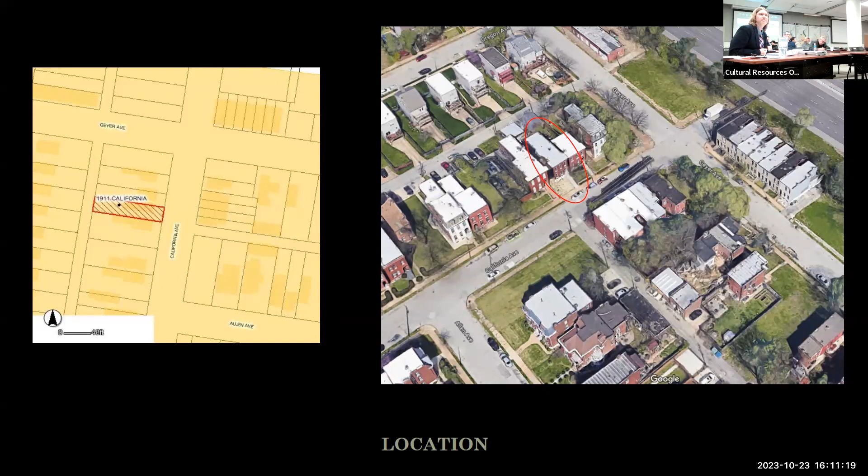Here's some context: across the street, an empty lot. To the south of the property, there are several existing historic poured concrete retaining walls. Looking north, to the north on the west side, next to the applicant's house, there are a few modern retaining walls that did not get permits. Not sure when they were installed, but they were unpermitted from us as well, though older, so they were grandfathered in.

Up top is a copy of the applicant's planting plan, which you've also received a copy of. Down below is a detail of what's constructed - it's a red Versalock wall.

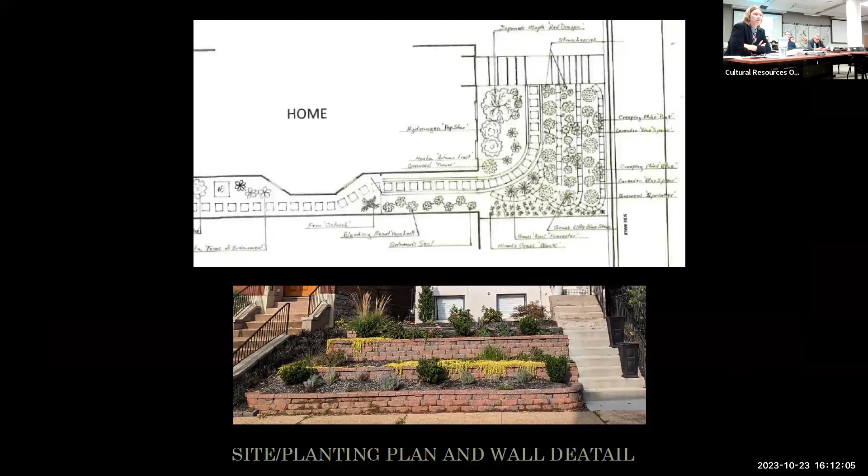Essentially, what the ordinance says is you can't install retaining walls on an unaltered slope. And if you were to, it's required to be based on a historic example, meaning a natural stone wall of some sort - base it on a historic wall and replicate that. So you can't do an artificial wall like she's done with the stone or artificial concrete, and obviously the design itself, this 3-tiered wall system, is not based on a model example. So we cannot recommend approval for this.

We have a letter from Fox Park. They also support staff's denial of the project, so we recommend that the board uphold the denial. Any questions, commissioners?

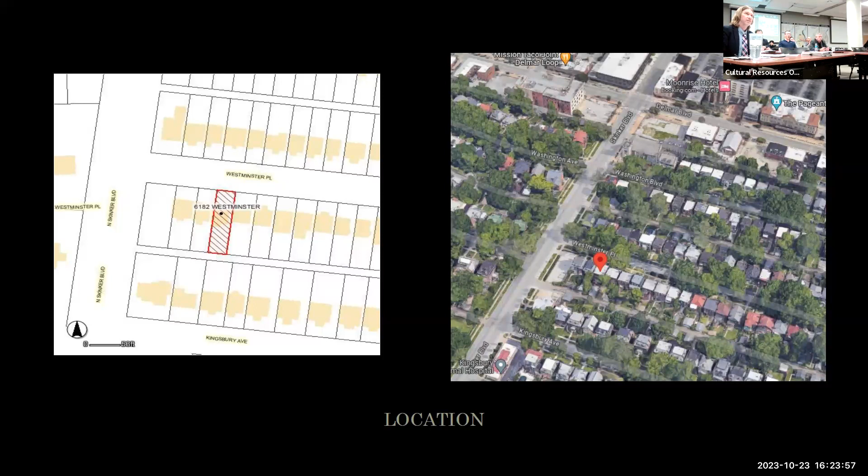Next, just a quick location. We're just to the east of Skinker. It's on the south side of the street, a very obviously intact row of houses on Westminster. There's some street level context. Obviously it's a mix of mostly frame porches. There are some masonry porches mixed in, but it's a pretty intact lot. This is looking towards Skinker. Okay, this is the current condition.

Some quick background. Back in July, the area building inspector stopped the installation of metal handrails on this porch. That work would require a permit from our office, but also a building permit because it's a handrail on a porch. We got hold of the owner, and they've applied for a permit. I spoke with the contractor. They'd already made the metal handrails, but they removed them and put back the current wood handrails. So what you see right now is the current condition.

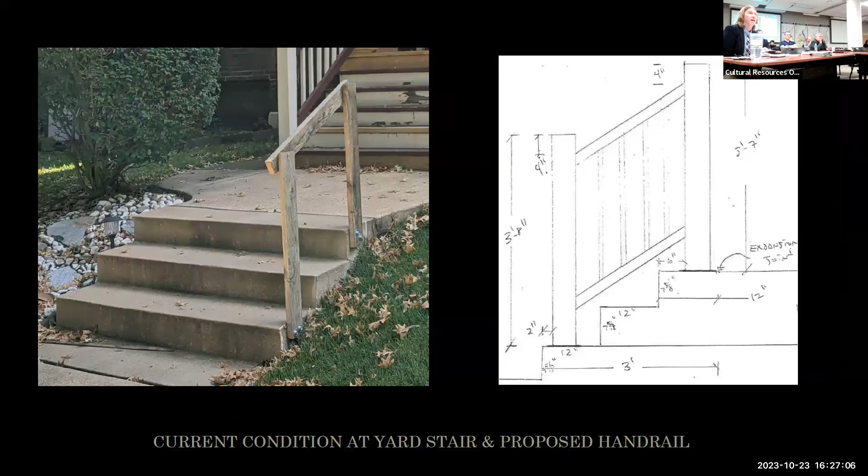So what the code says in Skinker DeBaliviere is you can't mix materials. If you have a wood porch, it needs to be a wood handrail system. So the proposal to do a metal handrail system is not compliant with the code. That's pretty much what this boils down to. The design is modern and doesn't really meet the standards in the code, so we can't approve it at this level.

You have a letter from the alderperson who's in support of it. I have talked to the neighborhood, and they are also in support. We have a letter showing they are in support of the project as well. But staff recommends that the board uphold denial, as the proposal does not meet the standards. Any questions for me?

What is the Skinker DeBaliviere Historic District Review Committee's reason for supporting this? They felt that the owner had already made a monetary investment in the project. They thought it's unfortunate, but they're using it as a learning opportunity, as discussed with the chair of that committee.

So just to clarify, did they try to tackle this without a permit? Yeah, it started without a permit. I talked to Mr. Gately, I believe he might be here as well. He's not a local contractor in the city, so he was unaware of needing a permit for the work. He claims ignorance. I understand that happens sometimes, but he did start without a permit.

Commissioner Richardson: So you said the existing handrail or railings are also not compliant? Well, they're not original. Had they been proposed today, we probably couldn't have approved them either because of the design.

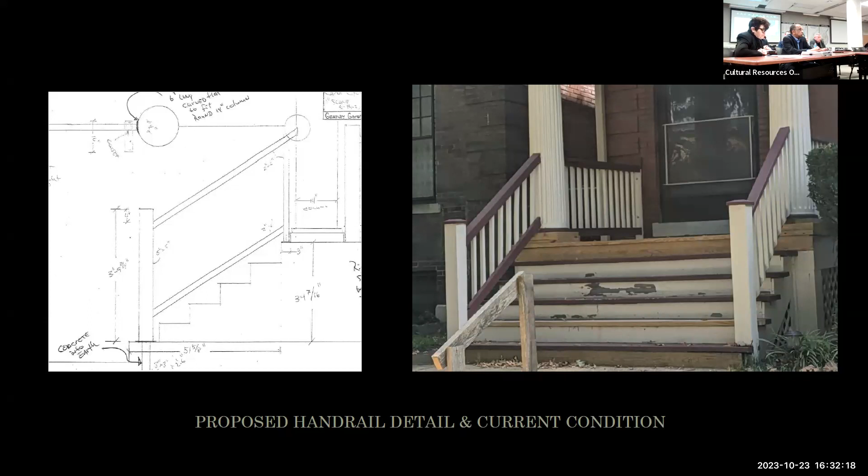Thank you. Kenneth and I are both senior citizens. We may not look it, but he's 77, I'm 75. We're aging in place, on a fixed income, trying to maintain the integrity of our home. We're looking for something more durable, sustainable, low maintenance over time, as well as cost efficient. We want to continue to increase the property value of our home, as well as make something aesthetically attractive.

That was the reason why we wanted to go to metal as opposed to wood, because it would be more sustainable for us as far as maintenance. There are some metal railings on our block as we drove over, and they're senior citizens. We thought maybe we need to look at another way as we continue to age in place and be more cost efficient, as well as maintain the integrity of our home.

So we're asking for your support. We went to Skinker DeBaliviere and they have supported us, and we've gone to our elected officials and talked to our neighbors around us, and we seem to have the support. So we're asking for your support for us.

If you have any questions as far as the size and all of that, I don't necessarily have those answers, but I'm sure you can get them from either Steve or myself if we need. Mr. Lloyd, do you have anything to add? I think she's covered it all.

Thank you. Commissioners present, questions? Virtual commissioners, questions? I've got one. So where are we in the process with City Hall and permit review of this? Have they passed for safety? They would be code compliant with the building code, yes.

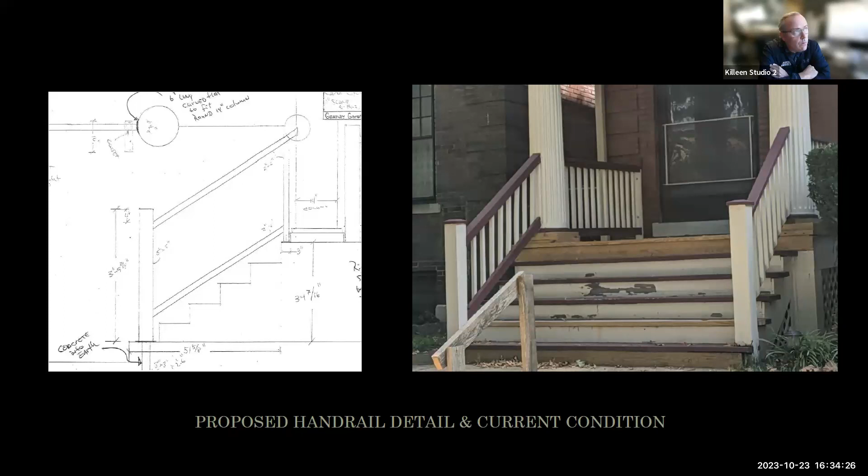Are you referring to the one in the terrace, Mike? Well, you showed two pictures. One was the flat one up on the landing, and then the rails going down. So the one on the left there. So the step railing and the railing on the porch are compliant. Again, I don't believe you need a building permit for the ones in the terrace. Okay, got it. Thank you.

Further questions from virtual commissioners? Can I ask, the existing railings that are there that you're going to replace, did you put those in? Yes, we had those put in. How long ago did you do that? About 20 years ago.

And how much did you get a price to see how much it would cost to replicate what you have versus doing the metal? Was there a price difference, or did you get a quote for replacing exactly what you have? We did not get a price quote for wood railings because we were looking at something that was going to be more durable over a period of time as we continue to age. We did not price wood railings. We were looking for something that would take us through the duration of living in that home.

Got it, thank you. And is it not true that if they had tried to replace what was there previously, and if they had happened to apply for a permit, we would not have been able to approve it? That is correct. As is, we've not been able to approve that design specifically, but we would work with them to modify it a little bit.

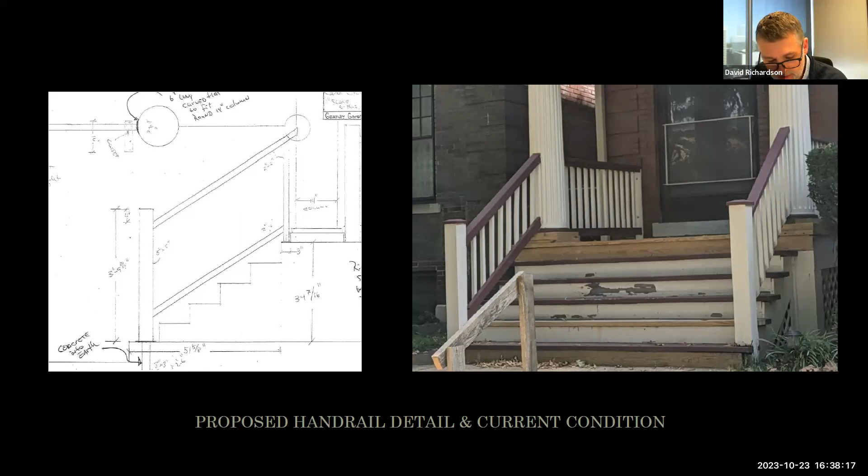Commissioners, we have a motion before us. It is to overturn the director's denial. Commissioner Allen, yes. Commissioner Hammaker, yes. Commissioner Colleen, yes. Alderman Ryan, yes. Commissioner Richardson, yes. Commissioner Robinson, yes. Chair abstains on this vote. There are six yeses, one abstention. The appeal is upheld.

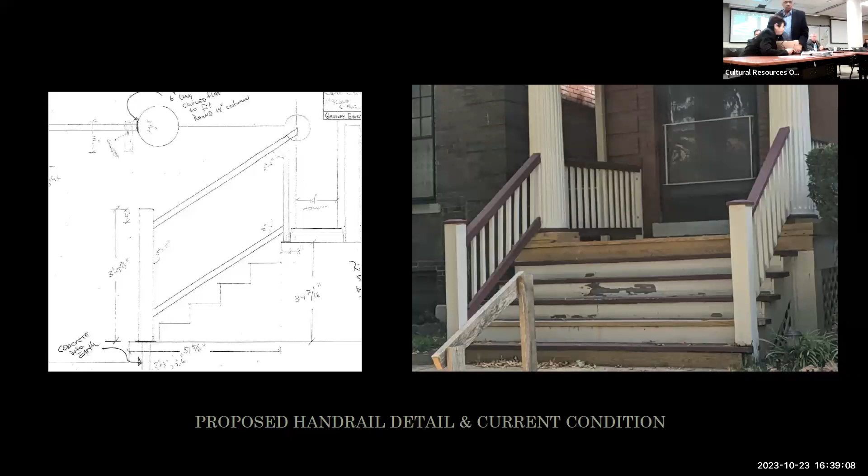Calling agenda item D. Do you want to take a break? I'm fine, but if anyone else needs a break, that's okay. Okay, here we go. I'm sweating, apologize everyone. It's hot as a lizard. We could take our jackets off. We could not.

Agenda item D. Good evening, board members and members of the public. My name is Meg Lousteau with the Cultural Resources Office, and I swear to tell the truth. I'd like to enter into the record Ordinance 64689 as amended by 64925, Preservation Review District Ordinances 64832 and 66609, the agenda, the PowerPoint, and my presentation. This is an appeal of a denial to demolish the building at 1308 North 7th Street. It is in the National Register District, the Sligo Iron Store Company Buildings National Register District, and therefore covered by the Preservation Review District standards. So we have jurisdiction as well as you.

The building is a high merit structure per the definition in Ordinance 64689, and represents a major component of the Sligo complex and the industrial history of St. Louis. According to the assessor's office, the current owner acquired the building in 2012. The owner now wishes to demolish. There have been no permits applied for or issued since the purchase date, and there are no plans for construction on the site, which would remain vacant. We denied the demolition application as the building was determined to be high merit, in sound condition, and the proposed subsequent development would be a vacant lot. The owner has appealed, and we are now here.

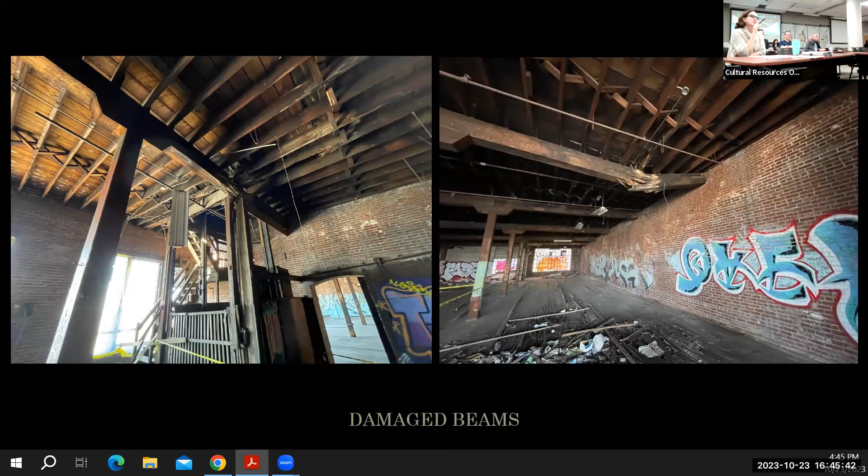And then, as I mentioned, there is an area of localized roof damage. This is a shot from the 5th floor looking towards the northeast corner of the building. You can see the area here on the left, and then there's a closer up version here on the right.

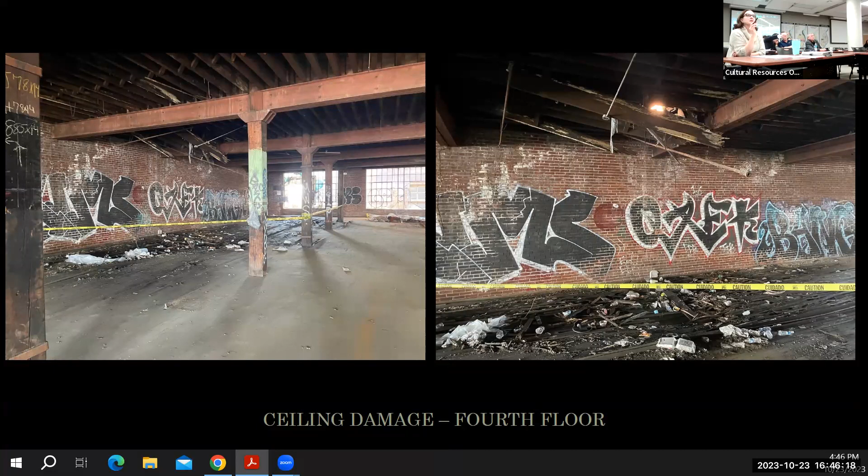That is the 4th floor. So that roof damage has damaged the 5th floor and also the ceiling of the 4th floor. In that spot, you can see both of these shots reflect that localized area. And then this is the rest of the 4th floor.

Okay, so in conclusion, we made these preliminary findings. 1308 North 7th is a high merit building within the Sligo Iron Store Company Buildings National Register District, so that means it's considered under the Preservation Review District Ordinance. It is sound under the definition in Ordinance 64689. The building is located 3 blocks from the America's Center Convention Complex, and there is potential for its reuse. There is no proposed subsequent construction; the result of the demolition would be a vacant lot. So we ask that you uphold the denial of the demolition.

And would you remind me, what is the definition of sound under the ordinance? That staff believes that the walls are capable of holding their loads for 6 months or more. So just to clarify, is it not the visible portions of the exterior walls and roofs appear capable of carrying their loads for 6 months or more? Thank you, board member. Yes, that is a more complete definition. Cool. And so what you just testified to with that full definition, you believe it's a sound structure? Yes, and Mr. Kapolis, the building inspector, will speak to agree with that and maybe offer a little more technical expertise.

With respect to reuse potential, as director of the Cultural Resource Office, have you witnessed similar buildings adaptively reused? Dozens in my career in New Orleans and a few here. Warehouses are usually very adaptable because they have a lot of open space, with more reuse options than you'd find in more constricted buildings.

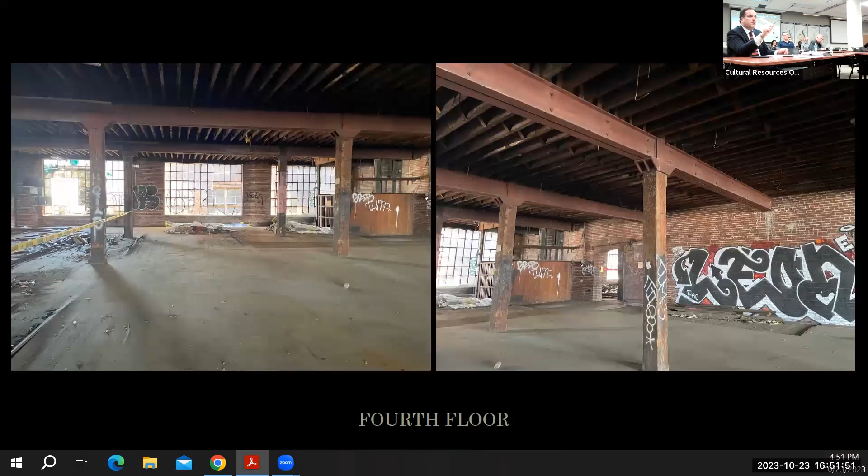The property adjacent to this building—if you go back to the photographs entered by Ms. Lousteau, go back one more, please, keep going, I'm sorry, I think there's a couple more before that—a little bit more to show the picture right there.

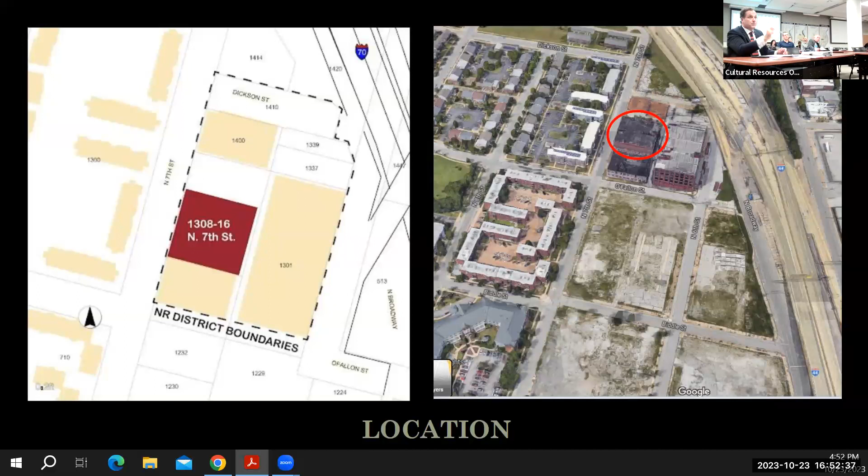If you'll go forward, I'll show you some of the structural damage—go back one, one more—you'll see there what remains of the building that burnt. That building used to come all the way out to the street; it was a 2-story warehouse, now completely gone, with just some steel structure and a portion of an exterior wall separated by less than 4 inches from the exterior wall of the building in question. We'll go forward, please—a bit more—right there, stop.

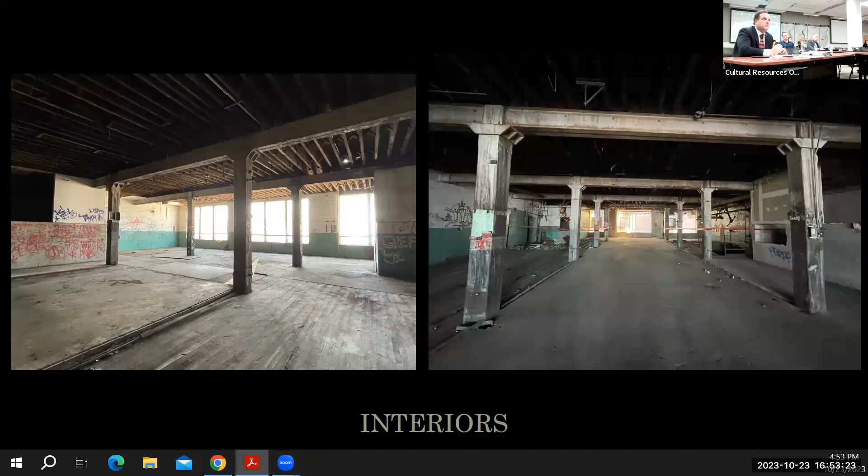One more on the inside. The picture on your left, the column that is halfway back on the left-hand side - do you see the red tape? That opening, the column immediately adjacent to it - if you could zoom in, the engineers will testify that the bottom portion of that column, from the tape on down, is completely deteriorated. It is offering no support at all to the member it's on, and each floor stacks on top of that column. If you'll go forward, you'll see some deflection.

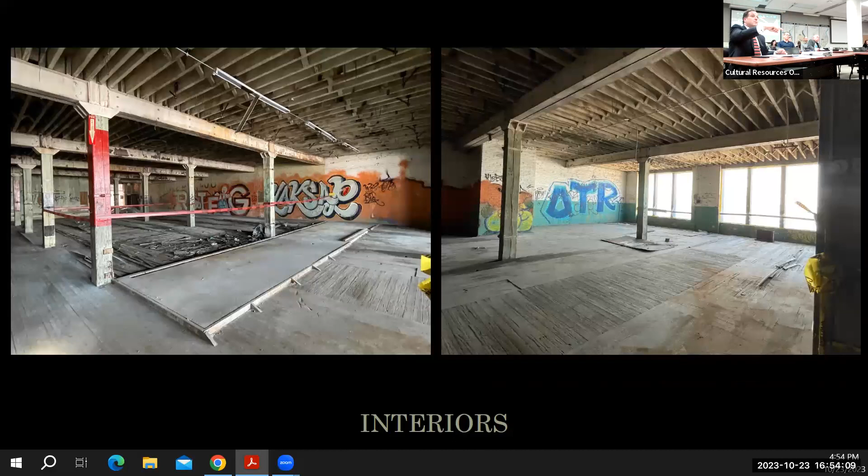One more. I think it's the next one. And that's on the other side. There's another one that shows it. Go a little further.

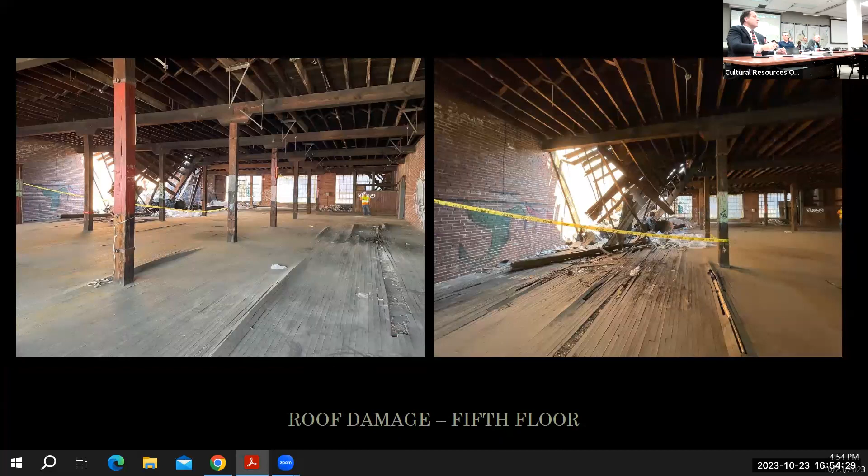That column, okay, this right here shows the collapsed roof. On masonry brick walls that are unreinforced, the roof provides the lateral support for the exterior walls. With the roof being seriously compromised, like it is in this corner and in the other corner, where you can see the gentleman in the yellow vest, there is another portion of the roof that has collapsed. That roof is not providing the lateral support necessary to keep these walls standing.

We have submitted to you in our application two reports, one from Daniel Sela. He is an engineer, he will testify next. We've also submitted a report from Jim Moriarty, also an engineer. Mr. Sela will testify regarding the structural soundness of the building. Mr. Moriarty will reaffirm those opinions and also talk about some of the safety concerns with potentially trying to keep this building standing and do work in the building. That completes my presentation, if anyone has any questions.

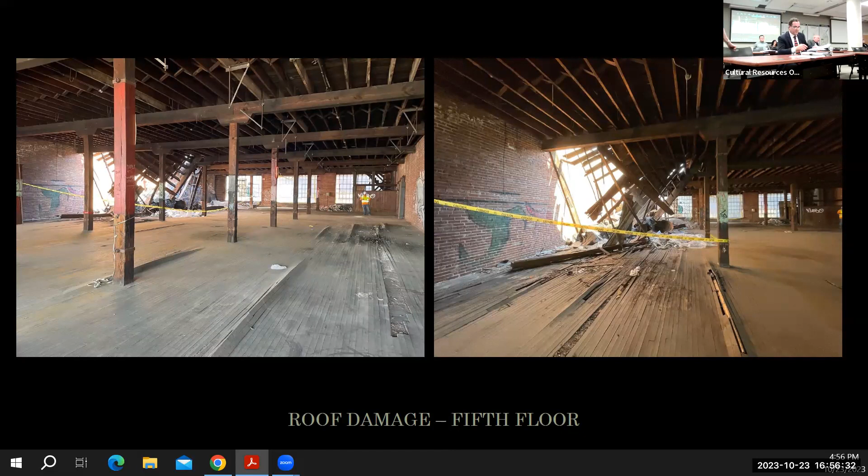Hello everybody, my name is Dan Sela. I'm a structural engineer from CSE Engineering. I swear to tell the truth. So I was engaged to conduct a structural assessment of this building.

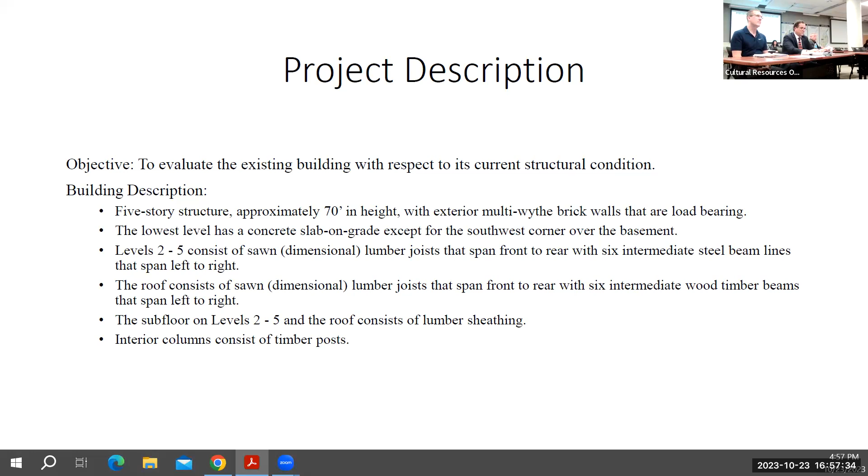The building is a 5-story structure, approximately 70 feet high. Exterior walls are multi-wythe brick, load bearing. The lowest level is generally a slab on grade except for the southwest corner. Levels 2 through 5 are dimensional or sawn lumber joists that span front to rear with 6 intermediate steel beam lines that span left to right. The roof is of similar construction except the beams are timber beams. Subfloors and the roof consist of lumber sheathing. Interior columns consist of timber posts.

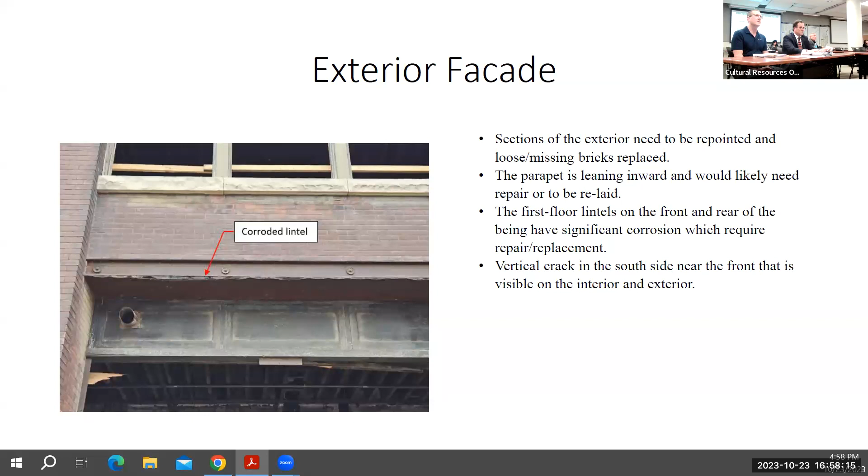Next please. The exterior facade from the outside generally looks like it's in acceptable condition - a little deceiving. There is some deterioration, sections of the building need to be repointed, loose brick. The parapet is leaning inward and will likely need to be repaired or relaid. Most of the first floor lintels on the front and rear of the building have significant corrosion and will require repair or replacement. There is a vertical crack on the south side near the front that is visible on the interior and exterior.

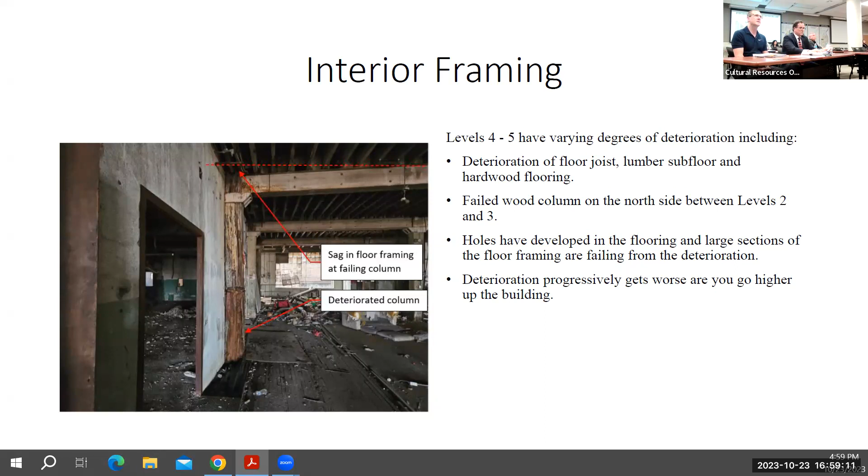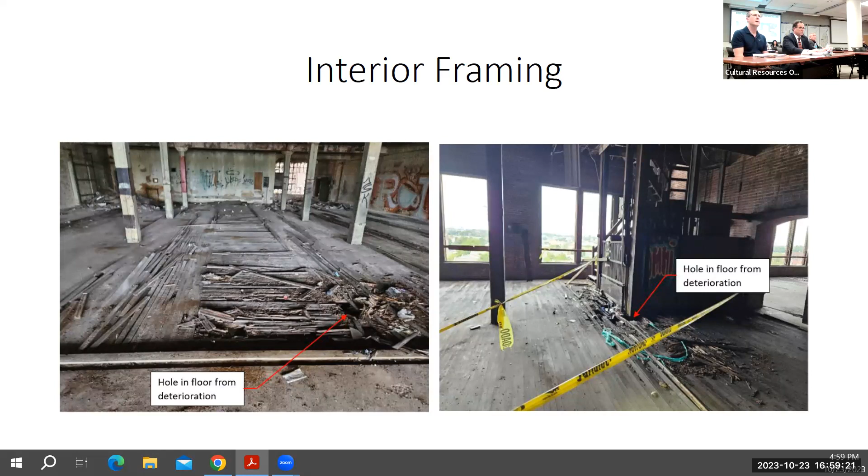There's numerous holes that have developed in the flooring. Large sections of floor framing are failing from deterioration, it's rotten. Deterioration progressively gets worse as you go higher up in the building. Next slide please - these are just some pictures showing the deterioration, holes in the floor, a hole in the floor next to the freight elevator. Next.

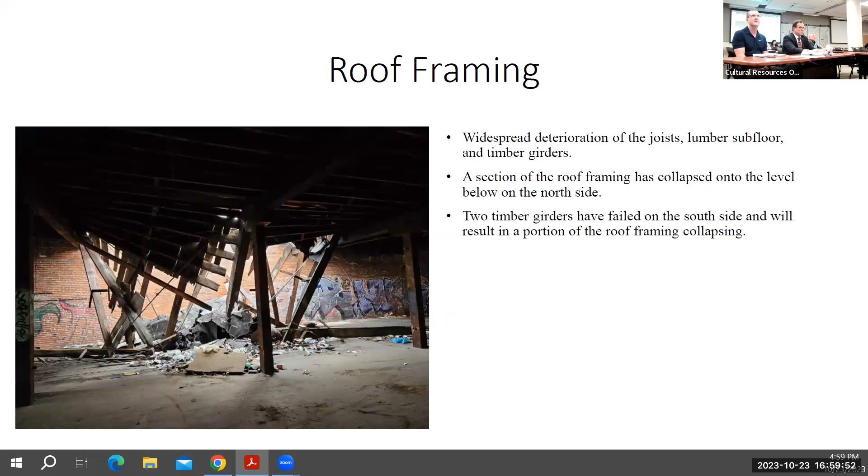The roof framing is the worst. There's widespread deterioration of most joists, subflooring, and some of the timber girders. This is the section on the north side that has collapsed. The area around it is in jeopardy of collapsing soon. And then there's 2 timber girders that have failed on the south side, shown in this picture - the roof has failed in these 2 locations.

Conclusion of the structural assessment: the building is unsafe for any occupancy and poses a life safety risk for anyone who enters it or is adjacent to it. On average, 30 to 50% of the floor and roof framing is structurally deficient and not sound. The floor framing acts as a diaphragm and also braces the exterior walls. The building is at risk of experiencing further partial or full collapse, and these conditions will only continue over time.

Predicting how long the building can remain without further partial or complete collapse is not possible. If we get heavy snow, it's likely more of that roof will collapse over the winter, or a strong storm could cause it. For structures in jeopardy of collapse, industry standard is to provide a safety perimeter of at least 1.5 times the structure height, where non-essential personnel are not allowed.

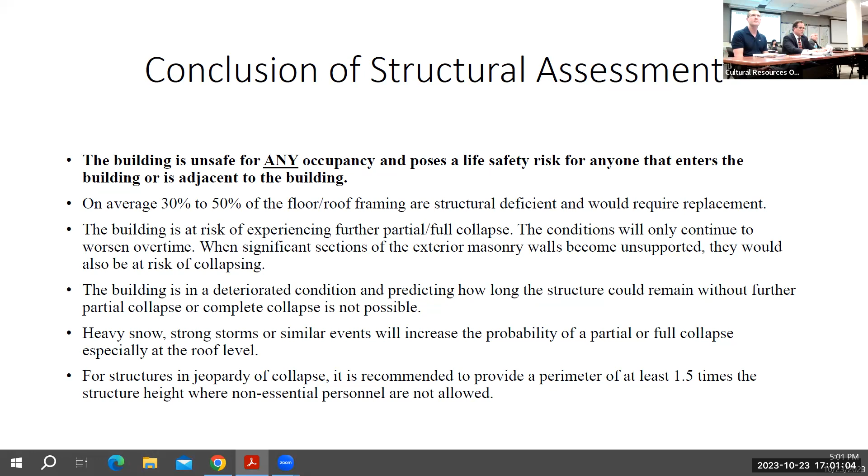This shows the safety perimeter. The 1.0 line is generally the worst case if the building falls outward, and the 1.5 times building height is the area where debris could be thrown as the building collapses.

As I said, I can't tell you how long this building is going to stand. It is in jeopardy of partial or full collapse as time goes on.

Can I ask a couple of questions to clarify this testimony? Daniel, can you explain your background, and do you hold any professional license? Yes, I am licensed in 9 states. I hold a structural engineering license and a professional engineering license. I have been doing this for around 25 years. My area of expertise is generally rehab of buildings

and additions. Second question: the safety perimeter you've outlined on this slide with the solid line box—are there apartments with occupants within that safety perimeter? Yes, right across North 7th Street there are apartments. Do you have an opinion, to a reasonable degree of engineering certainty, as to whether 1308 North 7th Street is structurally sound? No, it is not structurally sound.

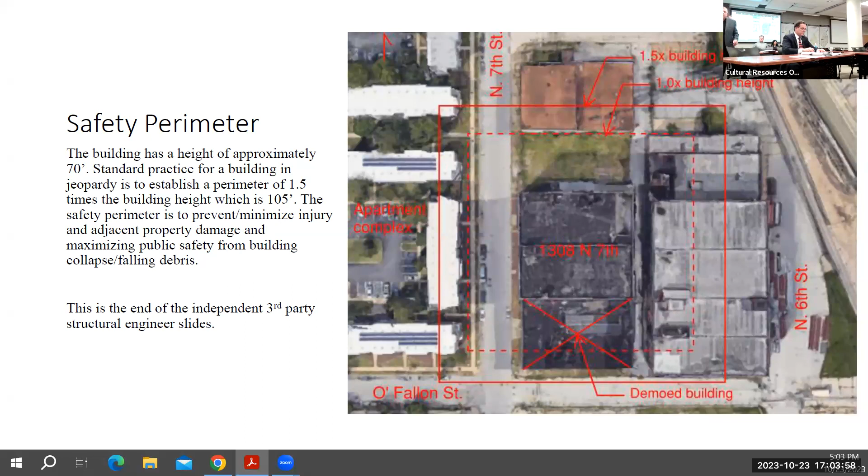My name is James Moriarty. I am here to tell the truth. I think I'm the oldest person in the room—I may have had 3 careers. First, I want to thank Meg and her staff for their professionalism over the last couple of months and their forthrightness explaining this whole process. Today I'm here as the third-party demo guy, but in a past lifetime I may have saved more buildings like this than any engineer in this town. I was also safety manager on the largest construction project in St. Louis history, the $1.1 billion new runway at Lambert Airport.

my crew has been down there preparing the 2-story building for demolition, and the slides you saw show the extensive cleanup effort to date, whether it was asbestos or needles, all that sort of thing. We've heard gunfire on a weekly basis inside the complex. We've called the police; they've told us they prefer not to go in there. We decided not to call the SWAT team on a weekly basis, and so basically this facility has a reputation as an unlicensed, unregulated indoor shooting range.

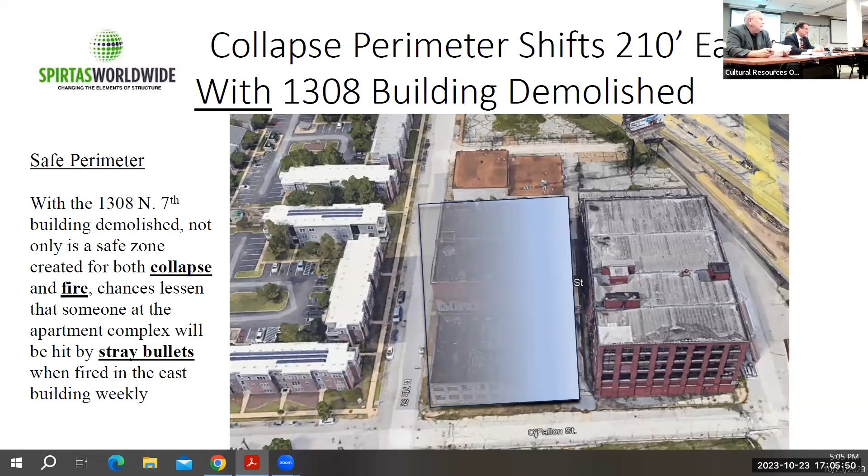Okay, well, this is just showing what the safe zone would look like if the 5-story building were demolished. You can go ahead to the next slide.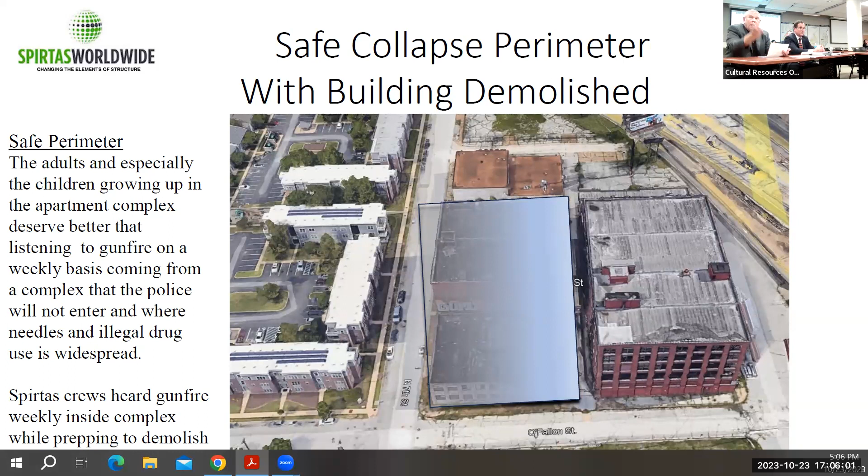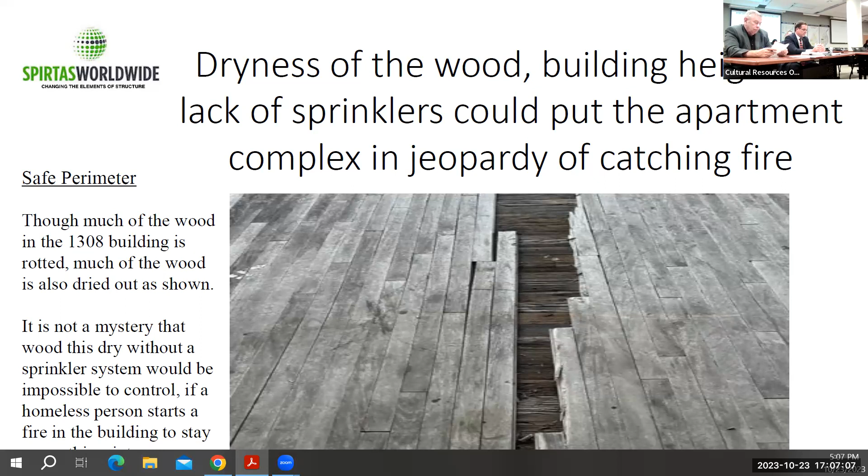Just to clarify, Jim, is it your opinion, to a reasonable degree of engineering certainty, that the condition of the building poses a fire risk to the properties across the street? Yes, and when your third-party structural engineer says 30% to 50% of the building is unsound, to me that means the entire building is unsound. That's all I've got.

Thank you for returning. Since we just saw the illustration of a recommended safety zone, I'm not an engineer or building safety professional. Is that something coming from city ordinance?

Well, actually, the building, if it was maintained properly according to city ordinance, it would not go this far for safety concerns. And the structural engineer failed to mention something to the committee about the building. The construction of this building was built to be earthquake proof. If you Google the construction standards for earthquake-resistant buildings right now, this building is one of them. It's so-called lumber, steel, and concrete that was used to build this building. So the construction and the system it was made with is still going to stand for the next 3, 4, 5 years.

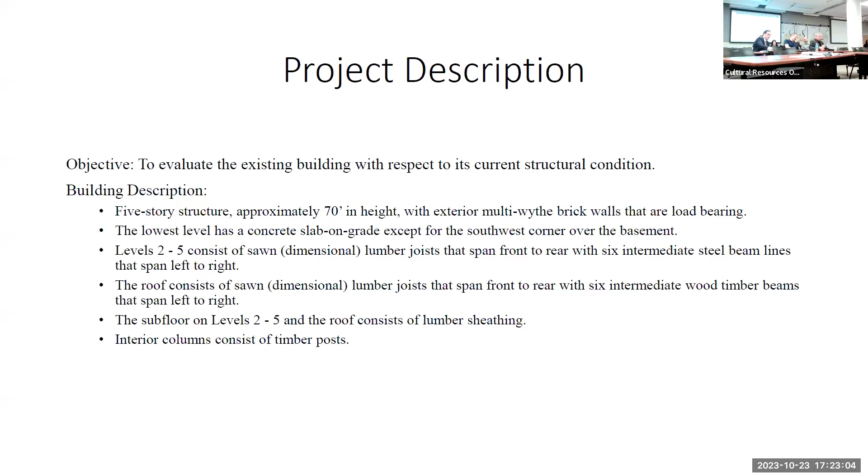Now I'm going to call that back.

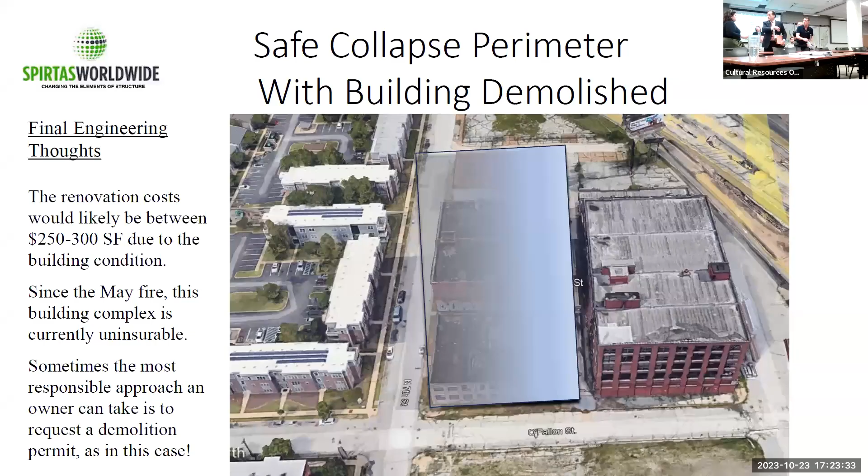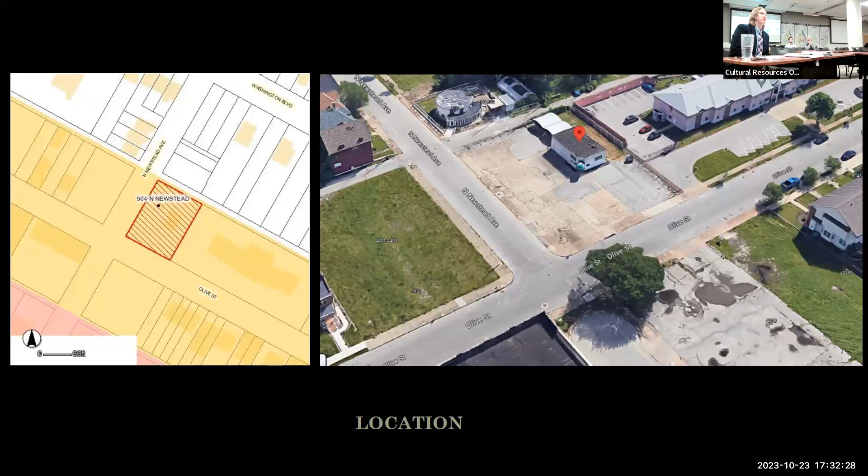Sorry, no worries. I'm gonna break this machine. Okay, great. This is the site in question. Some context: it's the very northern boundary of the Central West End Local Historic District. The alley is actually the boundary of the northern edge of the district. Some empty lots - this is looking east on Olive. I did a crude little mock-up on the left of where the proposed fence will go. We're going to hear today about a 6-foot fence. That's looking east, next. This is looking south. It's okay, that's okay.

This is looking west on Olive. To the right is where the fence will be going roughly.

Next, it's looking south on Newstead. To the left again is the proposed fence. That alley on the left side is again the northern edge of the district. And it's looking north on Newstead towards the outer edges of the district.

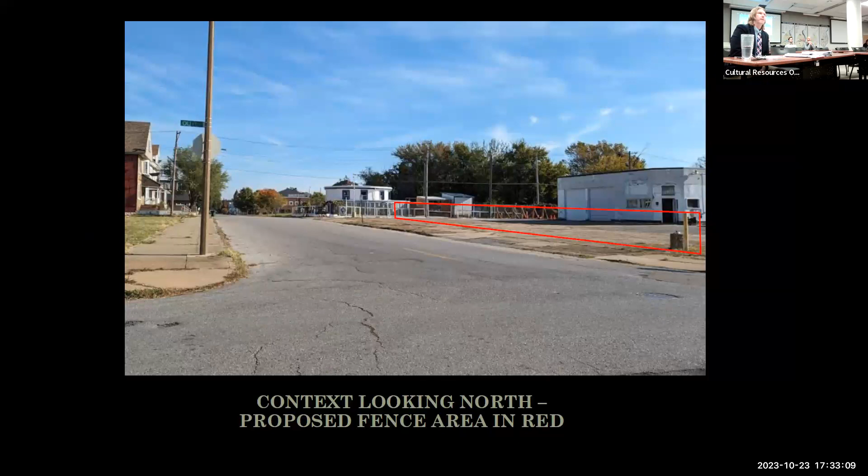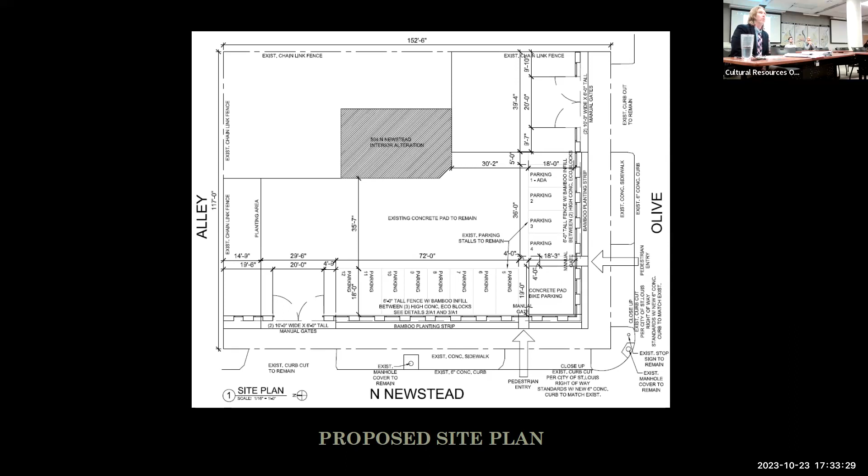This is the proposed site plan. The proposal calls for constructing a 6-foot fence on the Olive Street side and the Newstead side. On the alley side and the west side is an existing 6-foot chain link fence that will remain in place. So this is only for the 2 fence runs on Olive and North Newstead.

Next, this is the proposal. It's a mix of concrete block, metal wire, some wood posts, and then some bamboo would fill in the spaces where the metal wire would go across.

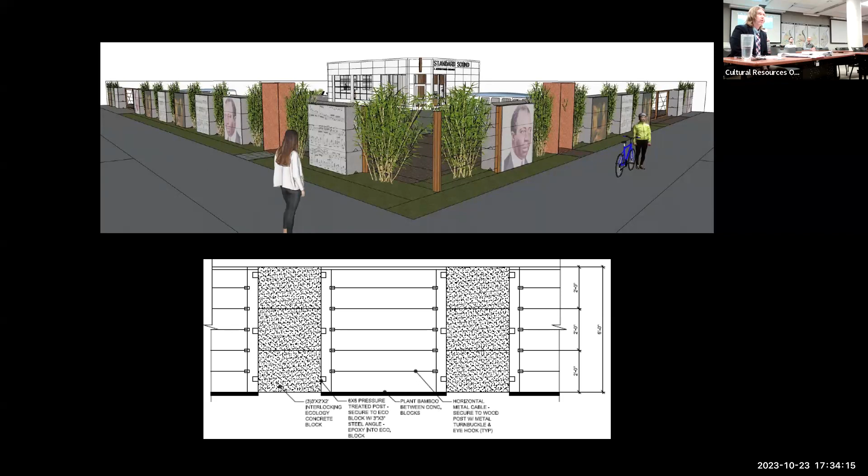It's 6 foot high. The standards for fencing in the Central West End for commercial buildings state it has to be stone, brick, wood, wrought iron, evergreen, or deciduous hedge. We're saying that the concrete block and the metal wire are non-compliant components of the fence. Wood and the bamboo would comply technically. So we're saying material-wise, it's the concrete block and the metal wires.

The proposal also features several murals, which we do not believe the current code contemplates. We're not going to make any comment on that, and it's really not up for review at this point in time.

The standards also say, in terms of placement, that you shall not have an opaque fence in front of the building line. There's a caveat in the code that says there are exceptions for corner properties. However, we feel that there are other options available, that they could do a fence that has some opacity to it, a little more see-through. So we believe that the location is also non-compliant per the code.

So given the materials and the location, staff recommends that the board uphold the director's denial for the proposal.

To date, has anybody popped in yet? Anybody? Okay, so to date we have not heard an official statement from Central West End. I did talk to Mr. Dwyer - his group was still in the process of getting a formal statement together, but to date we have not received anything. So we have no comment from the neighborhood group right now. So any questions? Happy to answer.

And you're saying this is a fence? It's applied for as a 6-foot fence. I'll say to that point, it was reviewed by zoning as a fence, and it does meet zoning code, and it's being reviewed by the building division as that as well. They're waiting for this decision before they finish their review. They had some questions about footings, but that's been addressed by the architect. Overall, it's been deemed compliant by zoning, at least for a fence.

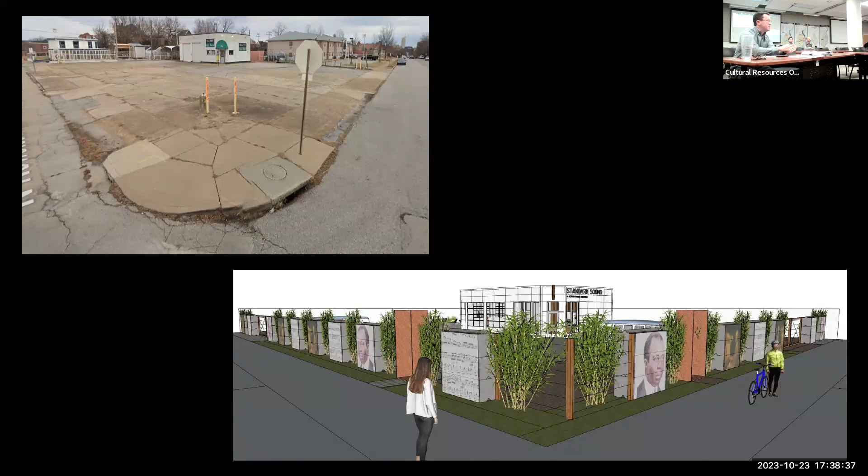It will also be a space where pianos will be on display. People can play them, or come and buy them if there's a need to perform with that piano. So there'll be a lot of activity, and also some expensive and rare pianos in this space eventually.

The fence line along the alley and to the east with the assisted living home is currently a 6-foot high chain link fence. The owner is concerned over safety, not just from access after hours, but because he's witnessed cars cutting through this property, driving down Olive or Newstead and cutting diagonally across it. There's concern for pedestrian safety in that space as well.

So that's where the desire comes for something more substantial than a wood fence, or even a more decorative fence — trying to find a way to provide both safety and a unique space with unique character, which goes along with the mission of restoring these old pianos. We want to use repurposed materials, so we're using reclaimed concrete blocks, often used for retaining or industrial purposes, in a way that provides safety from cars but with gaps between them so that something like bamboo can grow, giving some lushness and softness to that boundary.

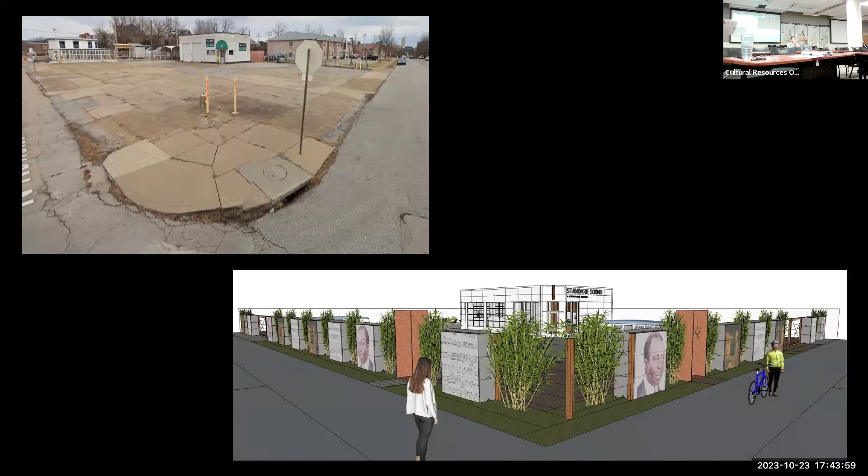Is the holder for agenda item present? They are online. This is a pretty straightforward one, but they are here.

Bob Betts with staff, tell the truth again. Enter into the enabling ordinance 64689, as amended by 64923, and then the Benton Park ordinance 67175.

This is an old favorite, another horizontal fence in Benton Park. We've reviewed many of these. Unfortunately, the current code does not allow for horizontal fences. Before I even get into this, you already have a letter of support from the neighborhood. They are going to be amending their codes in the future, and they will be including horizontal fences in that revised set of standards. Just want to put that out there, keep it in the back of your head while we go through this quickly.

The property is 2719 Missouri, in Benton Park. The proposal is to install a 6-foot horizontal fence on the south side that runs along the alley. This is the location, and this is the design. We've actually approved this before in a few different spots within the neighborhood, so it's a standard 6-foot fence.

That would be great. What is your motion? That the Preservation Board overturn the director's denial for the horizontal fence. Is there any discussion?

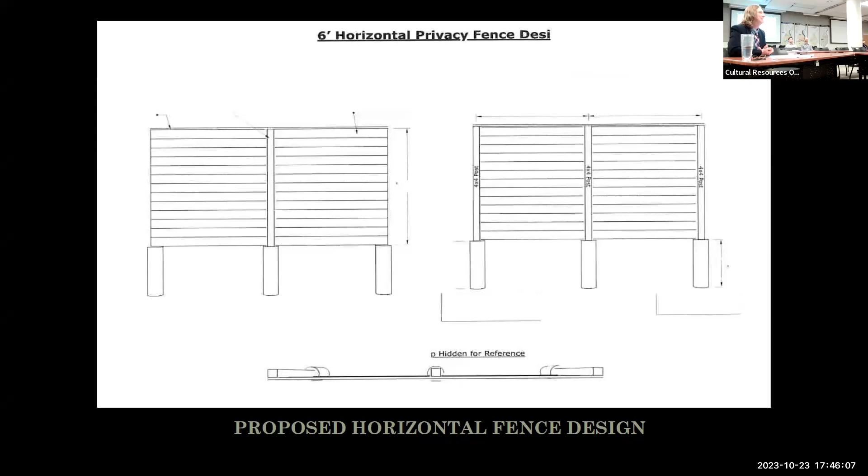Yep. On to agenda item G, and I'll save the best for last in my opinion. It's a great project coming up. However, not to taint the well.

Okay, so 3000 Salena. First, sorry, the usual spiel: must enter into the enabling ordinance 64689 as amended by 64923, the Benton Park ordinance 67175, my presentation and my PowerPoint. The proposal is at 3000 Salena in Benton Park.

This is the project. The proposal is to replace this 2-story open porch with a 2-story enclosed porch. The issue in Benton Park is that since this faces a street, this side of the building is determined to be a public facade.

We'll go through the context real quickly. Corner of Crittenden and Salena, the porch itself faces Crittenden. This is some context looking east towards the brewery, and on the right is the porch itself. So you're looking east towards the brewery, the porch at the right, and on the left is an enclosed porch that was done.

It's not an original porch, so it's there, we acknowledge it's there, but it's not a historic porch. Moving on, it's looking west on Crittenden, and again, it's a great little area.

As you can see, the current porch is in pretty rough shape, and they want to actually use it again someday. So the proposal is to remove this and construct a 2-story enclosed porch.

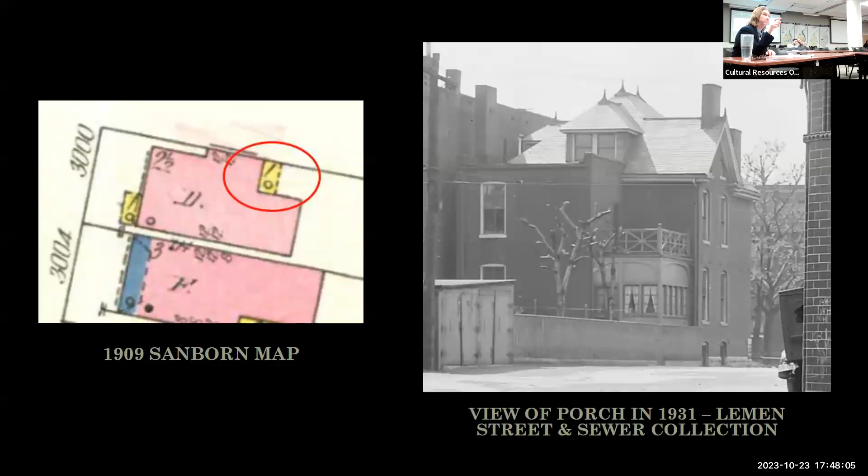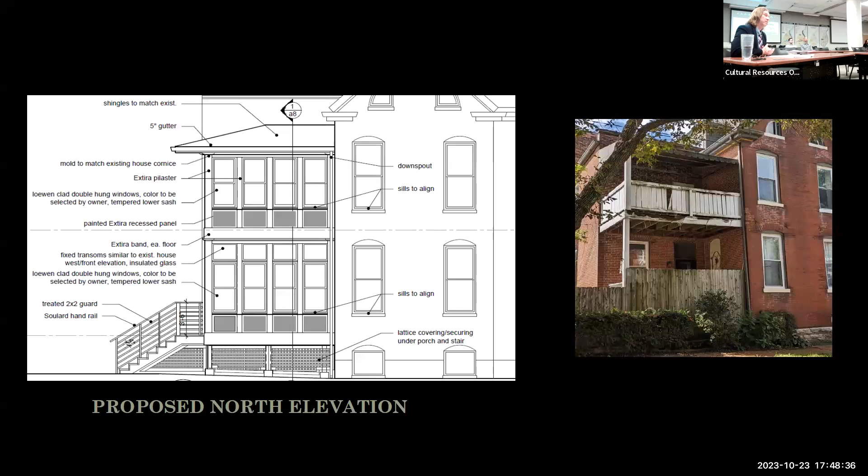Benton Park has also had their two cents, and have done a wonderful job to try and get something that we feel is compatible with the building itself, the streetscape, and the neighborhood as a whole. Go on.

Has there been neighborhood reaction to this? Yeah, we've had a few letters that you should have gotten in your packet from the neighbors. They're supportive of it, and the neighborhood itself is supportive as well. And also from the alderperson, who's also in support of the project.

Can I add one thing to that? If you do approve it, please state that we'll work with staff on final details and materials, because there are a few things they've agreed to do that are on the plans they've submitted that we want to make sure they include in their final drawings.

Question for Bob. What's the model example they're basing this on? There isn't one, that's the whole thing. In this location facing the street with what they want to do, you're just not going to find a historic example for an enclosed porch. We've done some digging around and found a couple in the rear that are a mix of masonry, windows and panels we've kind of incorporated into this design. So an actual perfect example we really could not find.

So they've gone with the sleeping porch look here. Is there nothing like that double-decker in the city that we can find? I drove way too many streets and we did a lot of research online. You'd be surprised to find this exact proposal that meets the criteria of a model example of 75 years. The problem is also it's an odd way the house is situated, with the L facing the street directly. Oftentimes they come off the rear of the property but don't have this kind of configuration, Mike. So it was really hard to find an example that would fit perfectly.